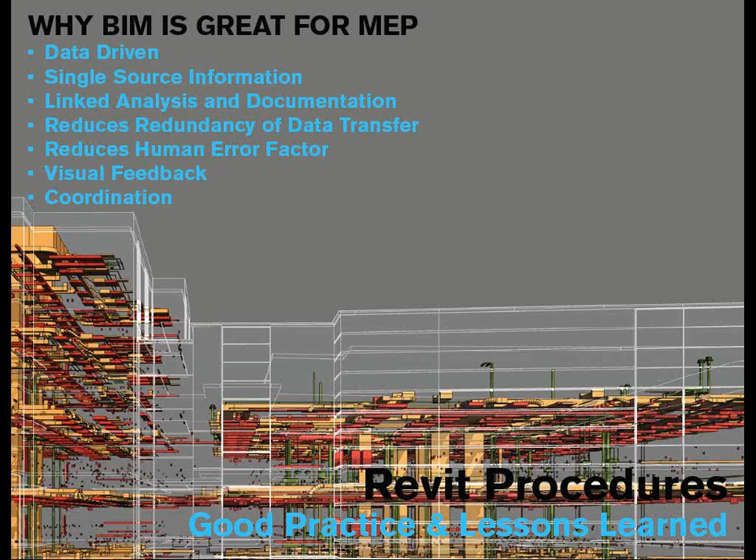You get the plus of visual feedback and coordination, which is huge. Just 3D in general, not even BIM. I mean, I think we're all there at this point.

So the first topic I'm going to talk about is at the management level, what I've learned, and I think this is probably one of the most important things I'm going to talk about tonight. We did a lot of extensive work when I was at Kling to build a framework that we're going to measure our buildings against. And the AIA has a document, you'll have to forgive me, I don't know the name of the document, where they cover these LODs. E202, thank you. I knew it was E200 something.

So they cover all these 100 to 500 different levels of development for BIM, and what we noticed as the MEP folks, and I'm sure the architects could say the same thing, was that the descriptions for these LODs didn't really fit the MEP building systems. So when we wrote our baseline contracts at Kling, we wanted to make sure that we were very transparent with our clients on what we needed to deliver to satisfy our contract.

And if you guys don't have BIM implementation plans and LODs and BIM contracts with your clients, there's a huge liability there, and there's a lot of gray area as far as what you owe them and what level of detail you're going to build against. So on the left is maybe a summarized version of level 300, where it's accurate in terms of quantity, size, shape, location, and orientation.

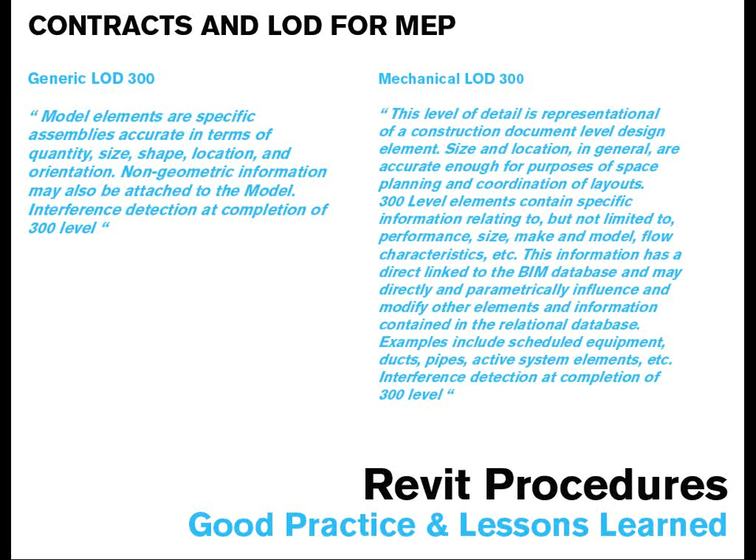Robert, you had something to say? Yeah, what that means is that the model has enough detail that someone can create shop drawings by reviewing the data in the model. It's still adding their expertise and knowledge to create the shop drawing or the shop model. But the LOD 300 elements themselves are not the shop model. That might be what the architect and engineer is creating to communicate to the next one.

Sorry. Yeah, we need a mobile microphone.

Yeah, so it's a discussion. We could probably do an hour discussion on contracts. We could probably do an hour on every slide I'm going to show you. So I'm going to try to get through them, and we can go back and talk about the interesting stuff in detail. But yeah, you can talk about contracts forever. There's a lot. It's a huge change for us.

So one of the other things I'm going to mention, as an overview, is company standards. I think this is a huge pain point for a lot of MEP firms and AE firms: integrating your company standards using a new platform. You're probably coming from a CAD platform, AutoCAD or MicroStation, something like that. And you want to bring over all your symbology and all your line representations and annotations and things of that nature.

One of the worst things I've found in a lot of the companies I've worked with is that they end up settling for the out-of-the-box content and annotations, and they don't do enough customization, and that's a huge problem. You definitely want to invest a significant amount of time making sure that you're either creating content or modifying content or creating templates and standards specifically around BIM. A lot of people I talk with want everything to look like CAD, and it's not going to happen.

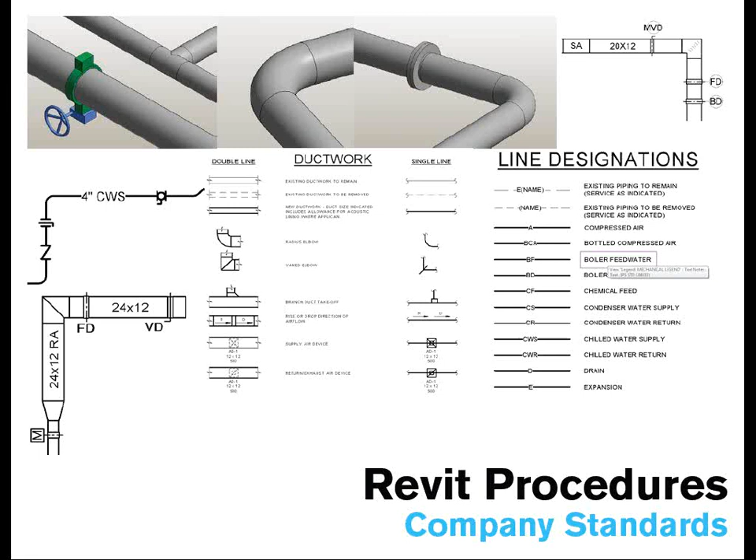Conceptual analysis. So I talk to a lot of engineers, and they think that they're going to waste all their money on concept design, SD level, DD level stuff. And I think they're focused on drawings and documentation, and they lose sight of the fact that when you're dealing with an architectural model early on in a design, there's a huge advantage for MEP folks because we're very analysis driven, calculation driven, like I said in the beginning.

And being able to take takeoffs from buildings and get areas and do preliminary energy modeling and preliminary load calculations with just the model you receive from an architect, it's a huge time saver. So, we would use things at a conceptual level, things like zone planning. It could be HVAC zoning.

And I've said this before to a lot of people I talk to, it's important to understand that with a BIM workflow, you're going to change maybe what you would typically show at an SD level. Maybe you typically show riser diagrams, one-line diagrams, things like that. Maybe you don't do that anymore.

Maybe you do things like preliminary calculations, preliminary equipment sizes, HVAC zoning diagrams, early energy analysis, things like that. Getting a general overview of the building and how your systems are going to integrate into it. You leave those one-lines for DD. So maybe you want to take a different look at what you're doing altogether.

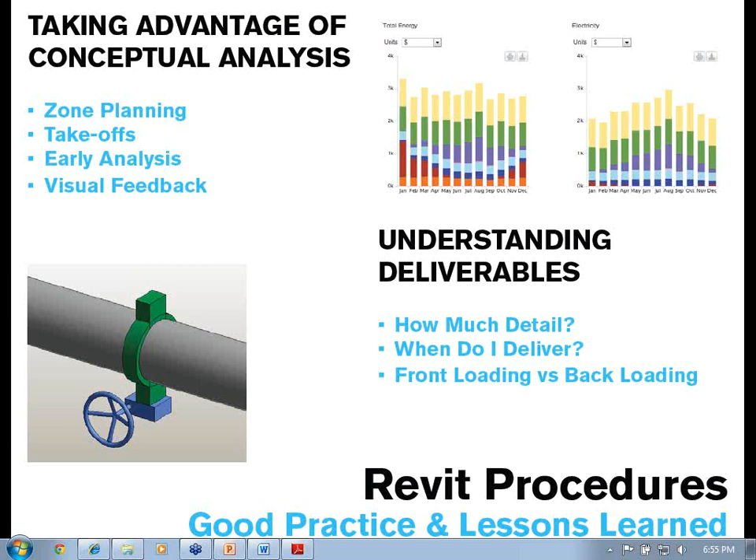Question? Yes. You keep mentioning turning over. Could you expand on what you mean in your world of turning over? Is it just here you go, here's my Revit model, or this Revit model is really valuable to my company, here's a Navisworks model with proprietary, and you can't touch it, that's it?

What do you do? So the question was, what are we really handing over? What is it? Is it a database, right? Is it an RVT file? Is it a DWF file? Ultimately, it's all of them, right? And to go back to the idea of the contracts up front, all that stuff has to be covered up front in the contracts. And every client's going to want something different.

There are clients that really don't. They just want the 3D coordination. They're not going to use any of the information. They may not even realize the value of it. And that's unfortunate. But there are plenty of clients that we deal with now that are going to continue to reuse that information as it goes through the contractors, for the purposes of facility management, to be able to understand where all the elements are in the building for maintenance purposes, for cataloging equipment, for cataloging spaces.

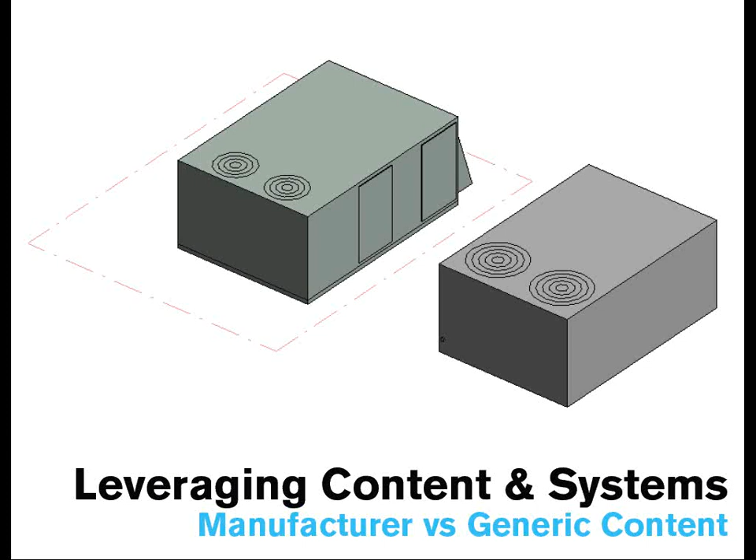I mean, they're basically the link, the data link for your information. So if you want to have some type of identification of anything when it comes to an element, it needs to have a parameter. It doesn't have to be a shared parameter, but the benefit of the shared parameter is that you can pull that information from multiple places, outside databases, internal databases, schedules, things like that. So that's the importance of the shared parameter.

So the thing about MEP, folks, is that almost every single parameter is scheduled, right? I mean, you see these schedules, and they like run off the sheet. We schedule absolutely everything. So it really didn't become an issue until MEP folks really started using live schedules and using all this linked information. They're like, how can we manage all these shared parameters?

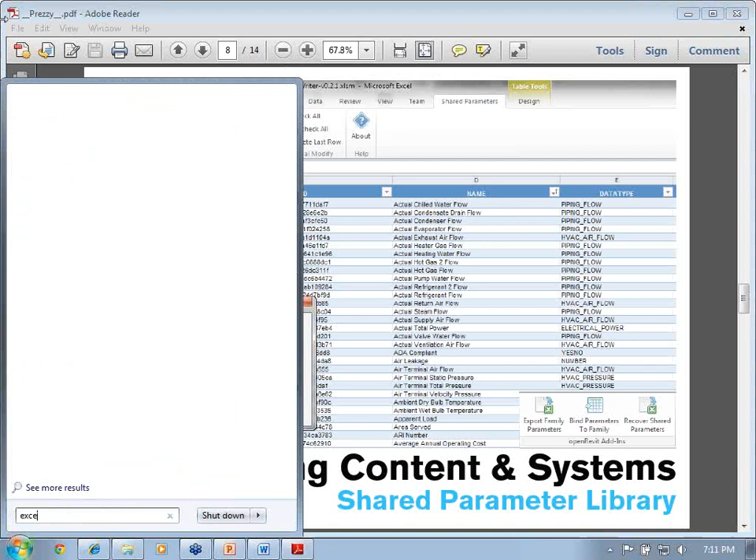Yes. I just got a question, and it's a plumbing question, but Revit MEP. I'm an architect, and I've been working pretty hard on Revit MEP, and I tried to set up a plumbing fixture schedule where the piping sizes would appear in the schedule. I couldn't get it to work. I don't understand it because the components show the piping sizes right there in the information of the model of a water closet or a lavatory, but I wasn't able to, in any shape or form, bring the pipe sizes into the schedule.

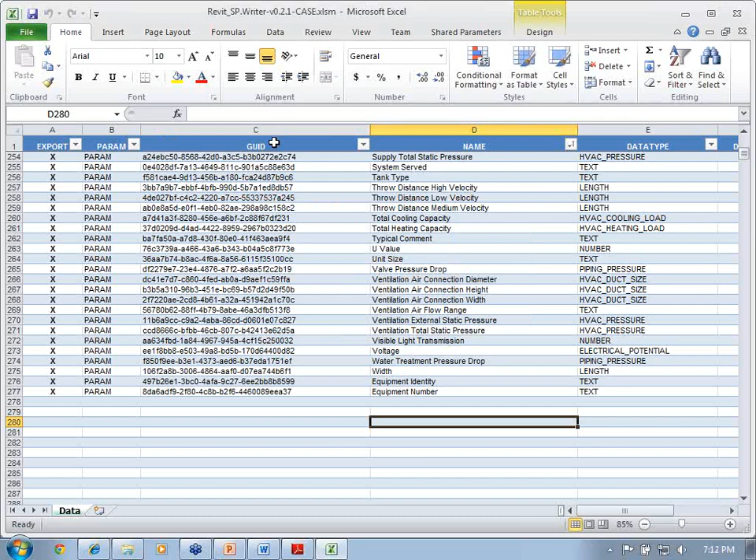I don't know what I was doing wrong. I assume it was because I was kind of self-taught, but it was extremely frustrating because the information was there in the model. You could go in manually and show the pipe sizes on the plans, but I couldn't get it into the schedule. Yeah, so the question was, one of the guys in the audience is having problems with pipe sizing and linking it up. It's there in the family. It's not there in the schedule. It leaves a blank.

This is why shared parameters are so frustrating. I've been where you were, and there isn't always a good answer. So one important thing to understand is that there are certain system parameters, right, that are just hard-coded into components. And those are usually available across the board. You don't have to worry about them. So things like manufacturer, for example, is hard-coded into just every piece of content. You can't delete it, but the good thing is it's there. Everywhere you look, it's there. So size, I believe, is a system parameter.

So pipe size is a system parameter. What I usually do is I will create, because when you're dealing with equipment, usually there's more than one pipe connection. So you don't want just one parameter to represent pipe size. So for the most part I ignore the system parameters if I can, and I'll create my own. So maybe your best bet is create your own pipe connection size parameter and link that up with the dimensions in your content.

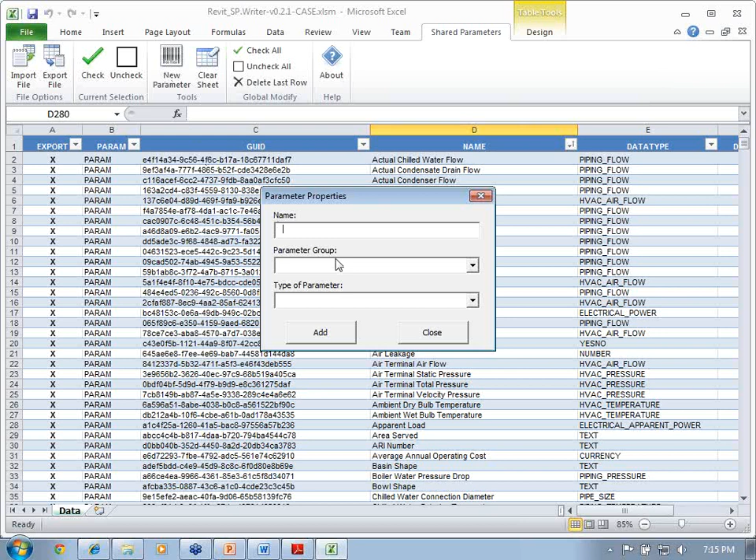You don't have to be in Revit. What I was talking about, you're clicking back and forth in that shared parameter window, and then you're binding it to a schedule. It's the biggest pain. So you can do this all outside of Revit. You can create all your shared parameters outside of Revit. And then when you're all said and done, you can just check whichever ones you want, or check them all, and just export it as a text file.

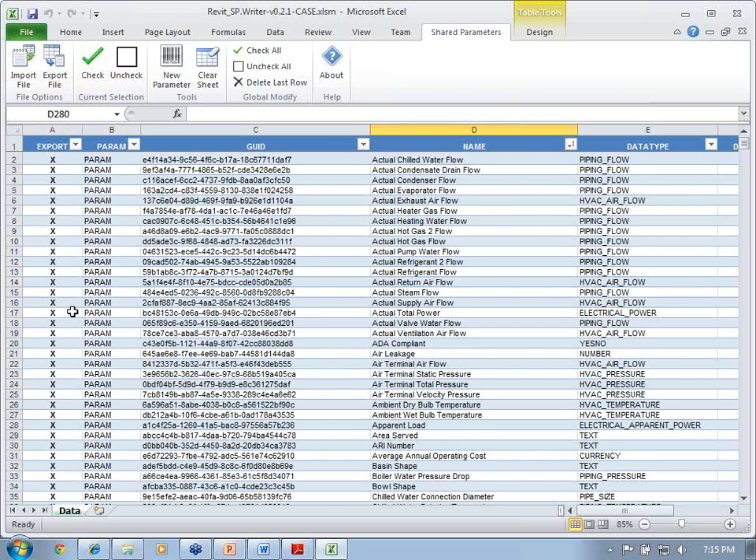What I've done in the companies I work for that works really well is we'll check off all the ones that will appear in a schedule. So for example, a fan schedule. I'll check every single parameter that appears in a fan schedule, and I'll export that as a single file. And the reason I export that as a single file is because of that tool down there on the right-hand side, and it's a plugin. I actually haven't released that yet, but now that I'm talking about it, I'll just throw it up on the website. It's not completely baked, but

once you have that text file, you basically open up that fan, you click bind, it asks you where the text file is, you click the text file, you're done. All those parameters work. You load that into your project, it's all ready to be used in the schedule. So literally, over like a 5-minute period, what was taking an entire day, you can handle in like 5 minutes.

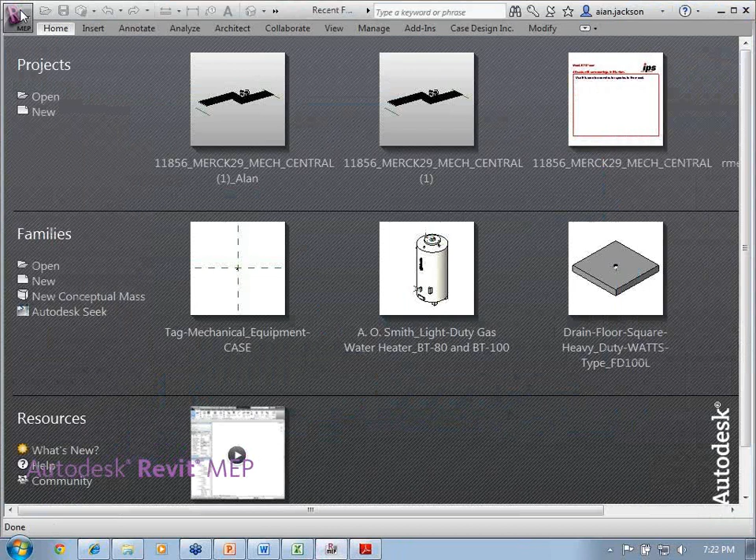Revit MEP, we can't do that, right? We can't say, stop checking, stop processing, stop. Well, no. Well, you're partly right. Yes, there are calculations constantly going on inside of Revit, and you can't shut them all off. But if you're not familiar with it, in 2012 they did allow you to turn off calculations on a

system per system basis. So if you don't want to calculate flow and you don't want to calculate pressure drop across a piping system or a duct system, you can turn it off. So every time you move something, it's not recalculating static pressure and things like that. You can turn them off temporarily, turn them back on when you want to do your calcs. Or you turn them off completely. If you're not using static pressure calcs, turn them off.

It's really only like a handful. For those of you that are not here, there's maybe like 5 MEP folks here. So a lot of what I'm saying is falling on deaf ears, but that's okay. It's okay.

I wanted to show this. Where's that located? Oh, so the question was where can you find this stuff? So again, if you go to my blog, the search tool actually works pretty well on my site. No, I think that's like disabling the system from being analyzed. Oh, I'll show you that. I'm going to open this up. Yeah, I'm sorry, I got the wrong question. The question was, where is this toggle for turning things off?

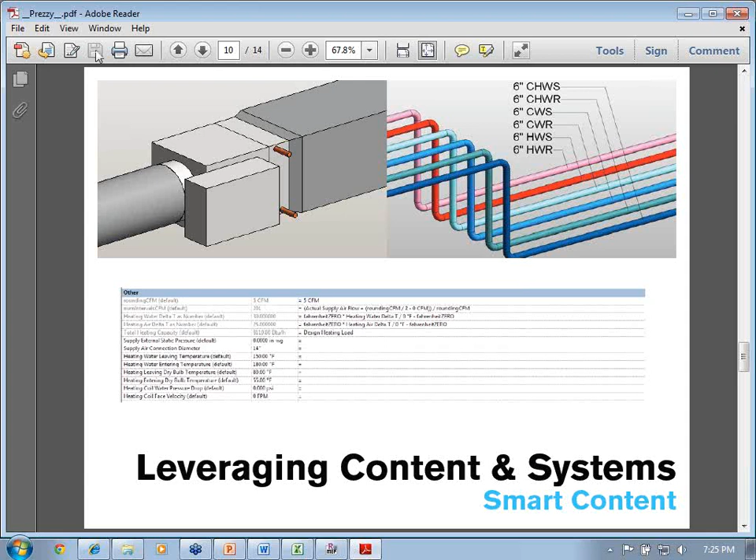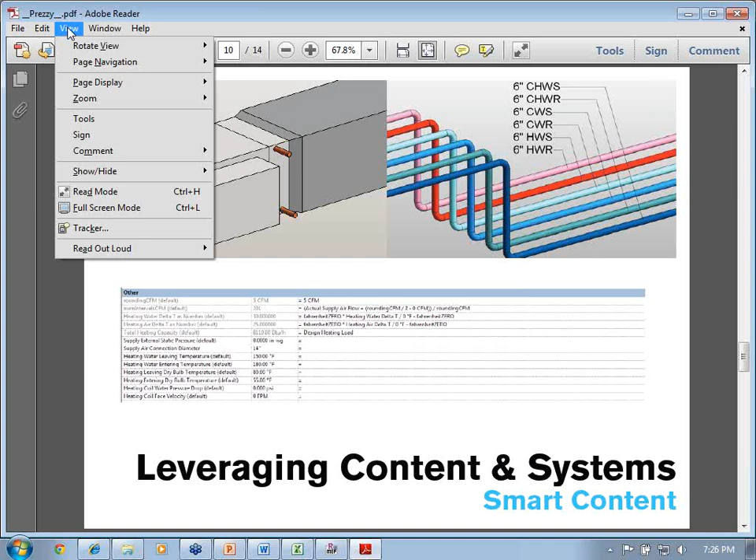But to answer your question, there's a new family category in 2012. Is it in 2012 only? Is that option in 2011? It's new in 2012. So you don't care anymore. All right. Well, for everybody else, under piping systems, if you go into the type properties of the piping system itself, so let's say you have a chilled water supply system, there's a calculations parameter, and on the pull down you get none, flow, or flow and pressure drop, something like that.

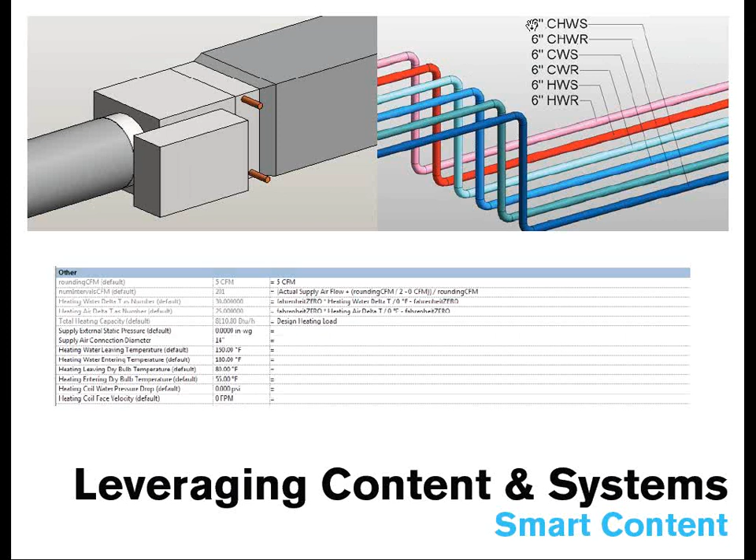So I'm going to keep cruising, and I know I'm probably ignoring questions. Okay, good, no question. I think. Yes. So that's that video.

In your formula-based laying out of the system, how successful have you been in that magical moment when you have to break a formula, and you can't fit an air handler because something's in the way, and you've got to break your perfect system? Yeah. Don't break the system. Okay. So the question was, what if you have to break the system up because you can't fit the perfect system at a certain point because of a re-engineered structural beam, or the compromises

you make. Well, ultimately, if you model it and it doesn't fit, you're going to have enough problems modeling something where it fits, and then they go to build it and maybe it doesn't fit. That's an issue in itself. If you're modeling something and it doesn't fit, tell somebody.

Run clash detection, please. There's built-in clash detection, guys. You don't have to use Navisworks. Please use Navisworks at the end of the week, at the end of the month, a couple of weeks before you have a deliverable. But on a day-to-day basis, you're working on a floor, you can highlight all this stuff and do a clash detection inside of Revit. You don't have to export it to Navisworks. Do that. I don't talk about clash detection today, though.

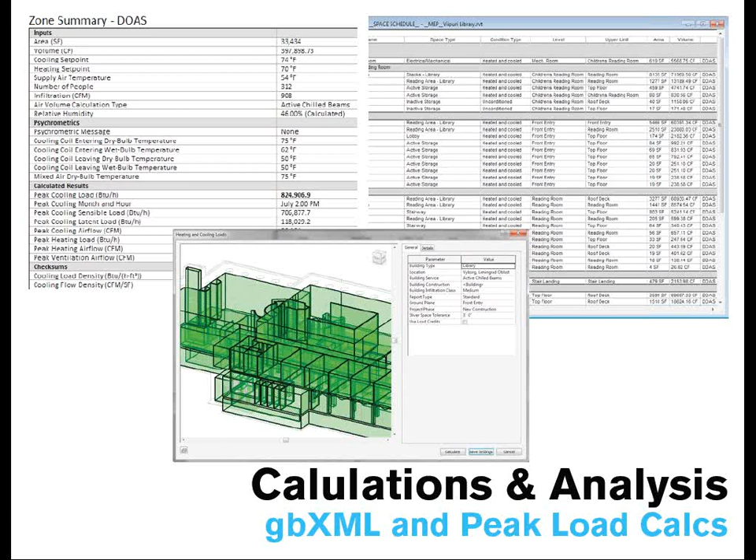So whether or not you use this, at least start using it, start testing it, comparing it against the other tools that you use, because what a great set of information to work off of as designers and engineers, to be able to pull in one of the most critical calculations of our buildings, which is the heating and cooling loads.

So leading from load calcs, I'm gonna go into, and I think I'm at the tail end here. So if you're thinking about leaving, stick around for the last 10 minutes.

So one thing I want to talk about is how you can now not only do load calculations, but you can carry that model on through for your whole building analysis, right? We're in a time now where almost every building uses the building performance method. You need to do a whole building analysis in order to meet code, to meet LEED, to get tax incentives. Almost every building has an energy model now. And one of the worst parts about energy models is having to recreate all that information and data that's lost along the way.

Building geometry, performance values, what type of spaces they are, what type of HVAC systems you use. In the old way of doing things, you go into eQuest, you go into Trane TRACE maybe, and you rebuild all that from scratch. And then it changes, and then you've got to find out what changed, and then change it. You've got two completely parallel things going on at the same time.

So while this translation into a whole building analysis isn't perfect, it does work. I've done it. It's all dependent on how well you can create a tight building, tight spaces, get surfaces to match up correctly, get correct volumes. Assuming you get all that ironed out, it does work. So there's a couple workflows we've been dealing with lately at Case for doing whole building analysis, and one of them is using Vasari.

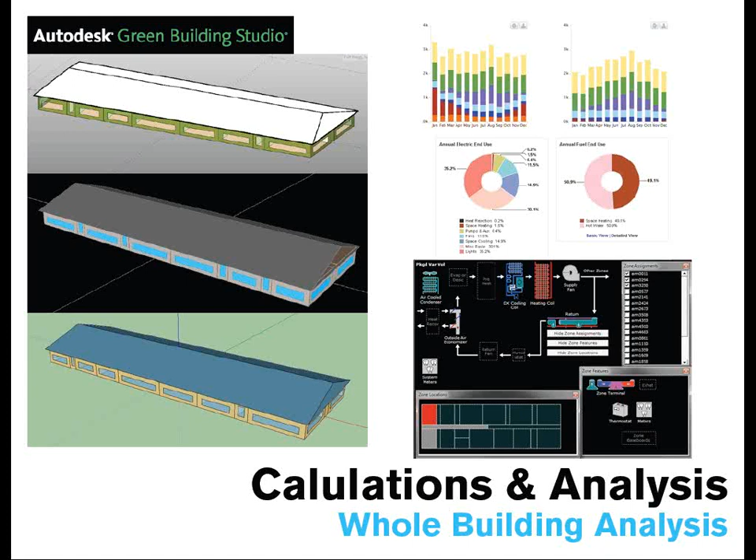So I think that's probably pretty good on time. Other questions online? You want to check that? Yeah, hopefully I'm checking these questions properly because it seems like it's the same question. Oh, thank you. So this is how you do it.

I'm interested in hearing more about the shared parameter sheet. Okay. Well, I think I ran out of time, honestly. But again, if you go on my site, I have a video explaining it, and all the files you need are right there, free.